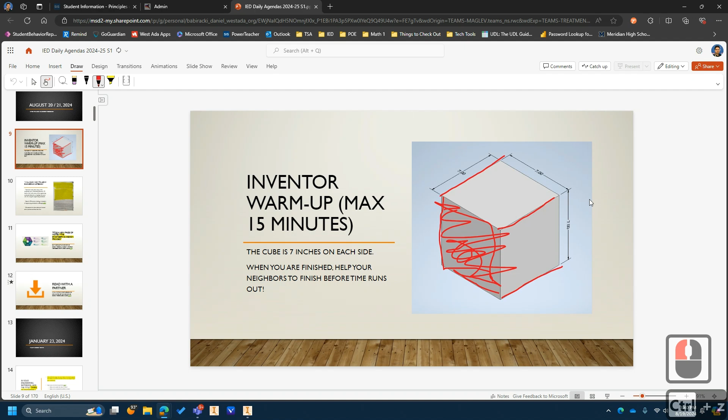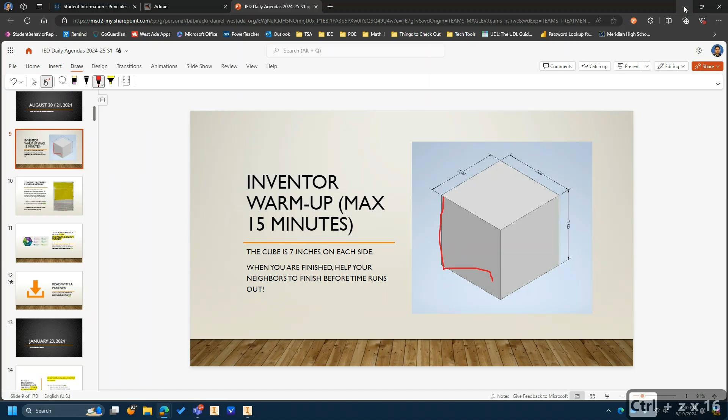Very good. Let's go ahead and jump on over to Inventor. We're going to go to File, go to New, don't click, just hover, and we're going to go to New Part. Every time you see that red circle, it means I have clicked. And wait a few seconds for it to load.

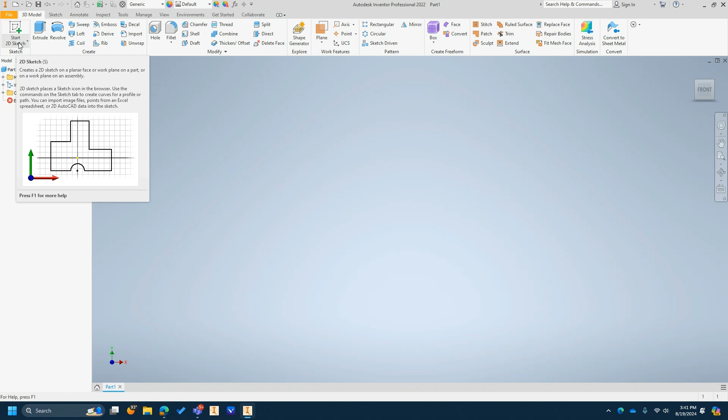Now that we are here, we're going to start by going to 3D Model and start a 2D sketch. Click on the top of the button, not the bottom, but the top. It'll bring up your coordinate plane, kind of like different pieces of paper, whichever one you want to click on to start drawing on. We are going to click on the XY plane.

And on our view cube, it should say front. From there, we'll see that we are now in sketch mode. We're going to go to the rectangle tool, and it's very important that we always start in the very center. That dot should turn green. We're going to click once.

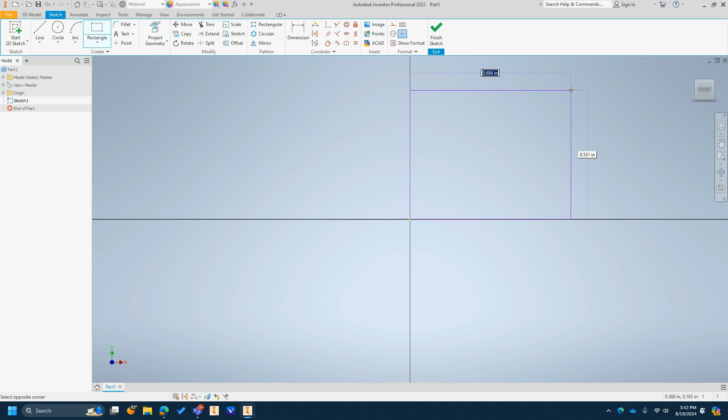It was just a click, not a hold. And then we're going to move our mouse without clicking over here, and click again. We've now made a square. Move this over, and now we just have to hit escape to stop drawing rectangles.

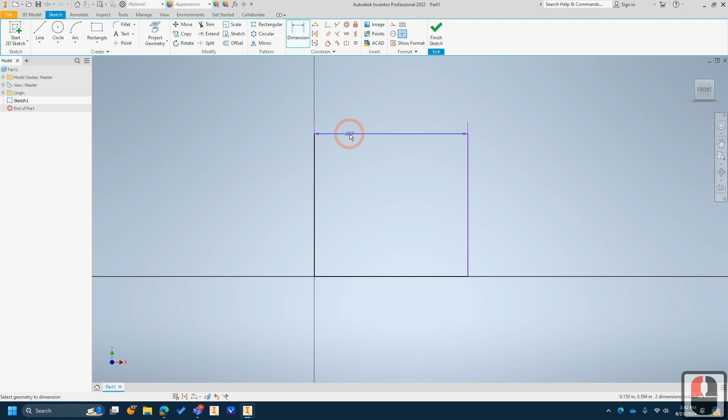We're going to go to Dimension. The Dimension tool is going to add the measurements for us. Let's go ahead and click this top line once, and then click maybe right up here. Click again. It's going to ask us how long we want that line to be. We're going to tell it to be 7 inches. Type 7 and enter.

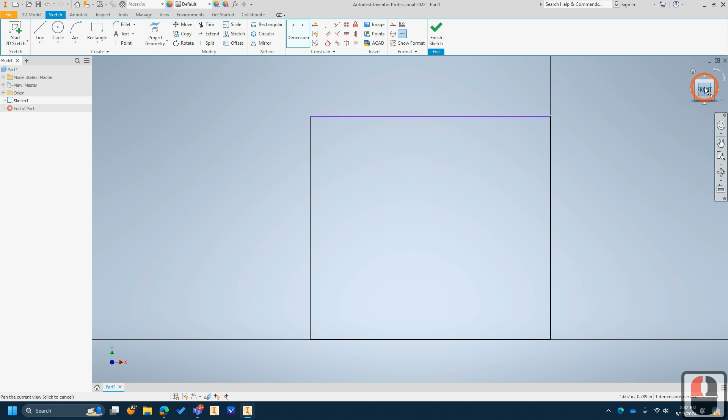Now, it has not disappeared, it's just gotten too big, so I'm going to click on the word front right here so it will zoom to fit. And we are still in dimension mode, so let's tell this how tall it needs to be. Go ahead and click on this line, click over here, and let's delete this and tell it to be 7 inches. Perfect, all the lines are black, that means it is complete.

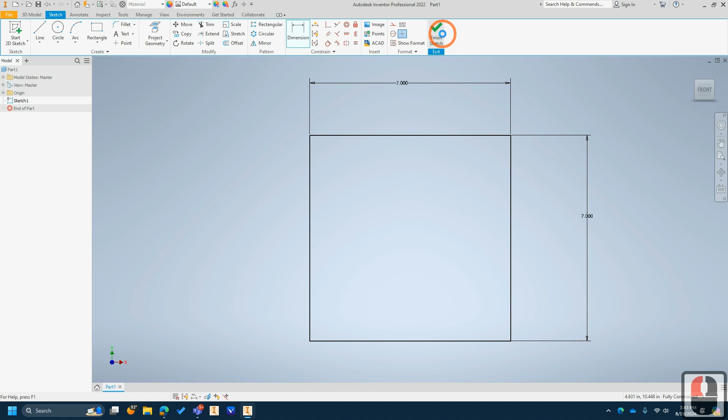We will click Finish Sketch. It zoomed into the space. Let's go over here, hit the house button so that we can see all of it. And then the last step is we're going to click Extrude, 3D Model tab, then click Extrude.

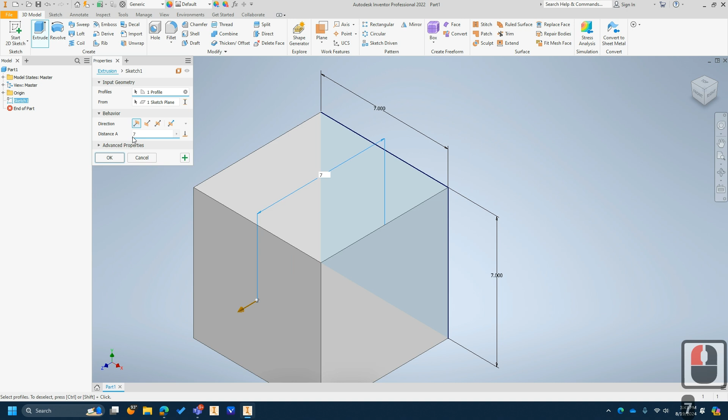And then we're going to tell this distance to be 7 inches. And you know what, let's make it go the other way. And then hit OK. Lastly, hit the house button so it's zoomed to fit, and that's it. We have now completed our 7-inch cube.